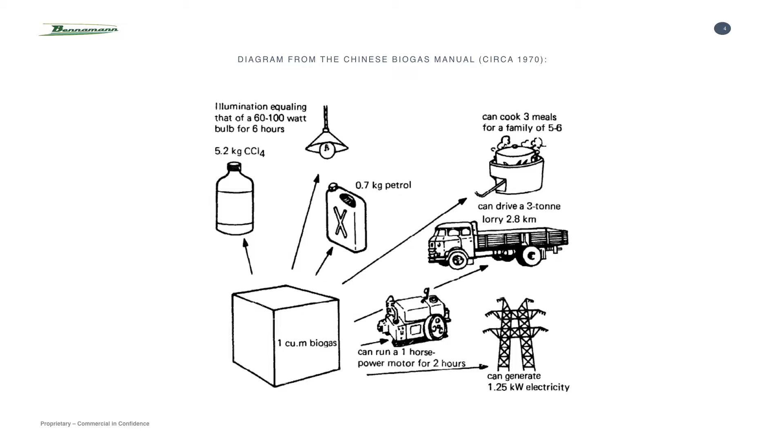But you can take a little graphic like this out of it, and it gives you an idea of what you can do. Some of these numbers are a little bit optimistic, but nevertheless they're not that far out. If you get 1 cubic metre of biogas, it's equivalent to about 0.7 kilograms of petrol—actually more like 0.5. You can run a 1 horsepower motor for 2 hours, drive a 3-ton truck 2.8 kilometres, and get 1.25 kilowatts of electricity. And of course you get the heat as well because it's produced locally.

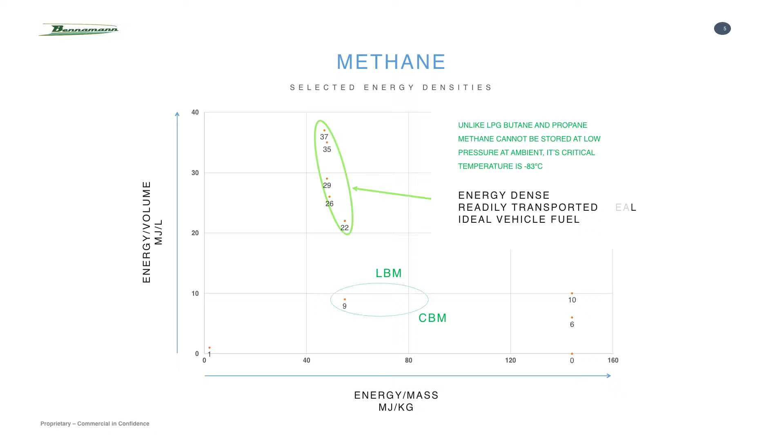And if you want to drive a heavy vehicle, then the only sort of gas that really works in its liquid form is methane. I should say liquid natural gas and methane are not the same thing by any chalk—as you get further and further into the industry, you find that out.

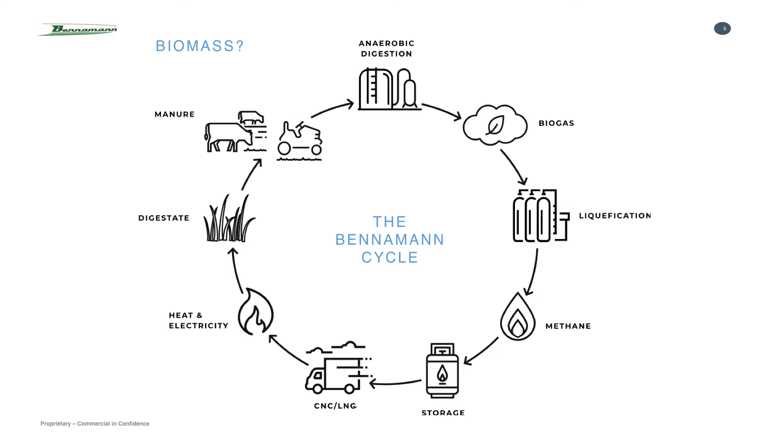So we came up with this idea that you take the biomass, whatever form it is, as long as we can digest it anaerobically, and turn that into biogas. If you liquefy it, you've got a fuel with energy density pretty similar to petrol, propane, or butane. You've got your methane, if you can store it, you can transport it and use it to create CNG and LNG. You can either power vehicles or use it as a direct replacement for heat and electricity. The first engines were gas engines, back in the late 19th century.

What's left after you've done all of that from the digester is a very rich digestate, which you put back on the land, containing all the nutrients that plant took up during its lifetime. Provided you put the same digestate back on the same land - and I must stress that if you start putting digestate from other land, you're putting nutrients in the wrong place - provided you close the cycle, you have a cycle which is completely sustainable and zero carbon.

So it seems like the perfect solution when you start going through this. There's a lot of caveats, and people who've worked in anaerobic digestion on the large scale will know there's lots of challenges in meeting that. But it seems like biomass to methane is the perfect solution.

It has a zero carbon footprint, effectively - I'll come back to that in a second. It's a better fuel for combustion in engines than diesel or petrol. A pure methane engine has the highest octane number you can have, so you can run at very high compression ratios to get very high efficiencies. The only thing that should come out the tailpipe is CO2 and water, so it completes the cycle.

Because of its energy density, it's really the only viable fuel that can replace diesel, for the reasons Penny just said. As a liquid, it's very transportable - you can move it and use it where it wasn't necessarily generated. And as a fertilizer, it adds back to the economy. By putting the digestate back, you're putting a lot of carbon back into the soil, a huge amount, because the parts you can't digest are mostly carbon in the form of lignin.

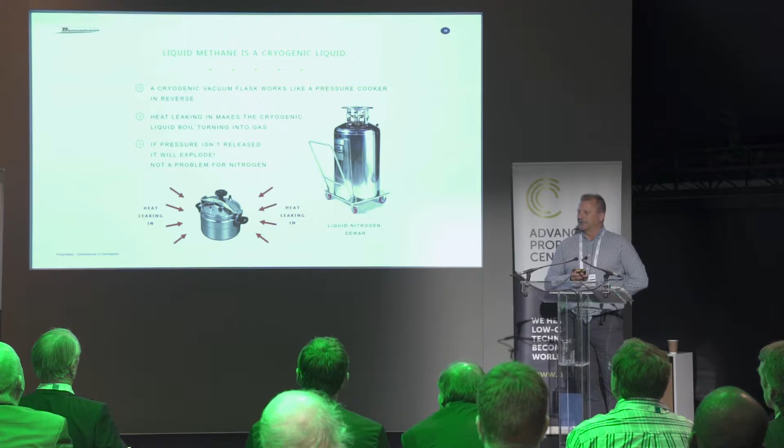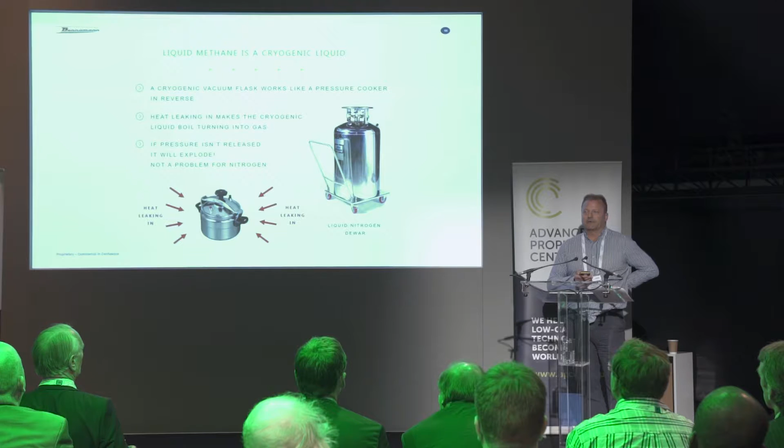Everyone knows a pressure cooker - you put a flame under it, heat it, get it boiling, and eventually release the pressure with a valve, getting a higher temperature in your water, which cooks faster. Well, that's the same for cryogenics, except the heat going in is just from the surroundings, so you want to stop that. Otherwise, eventually, if the pressure isn't released, it will explode. And that's not 'it might explode' - it will explode.

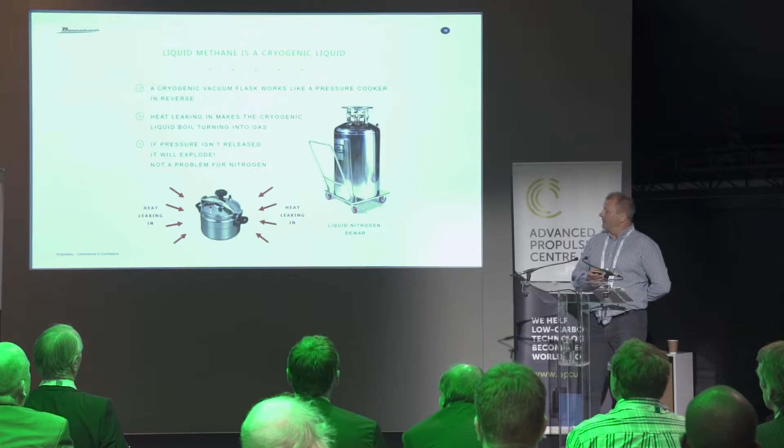Of course, it's not a problem for nitrogen. All of the standard cryogenic technology is based around early technologies coming out of the Second World War, which used cryogens a lot - they were used in the space program, and they didn't really care about emissions in those days. A lot of that technology comes from just storing nitrogen, which you can release very easily because it's part of the atmosphere. Liquid oxygen you can release because it's part of the atmosphere, as is argon.

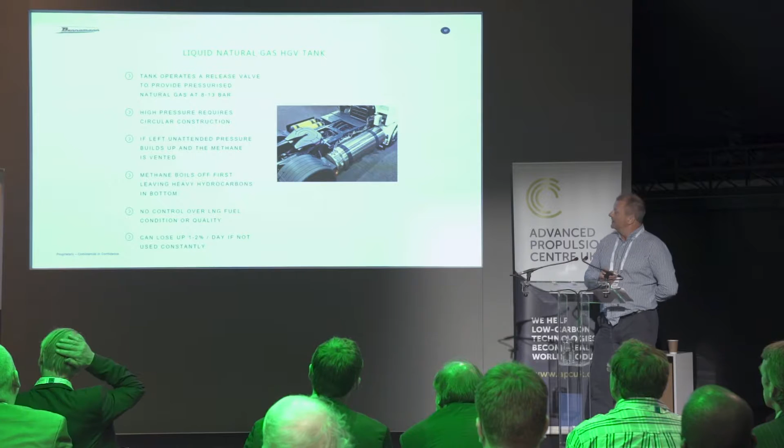But methane explodes. This is exactly how the technology on a liquid natural gas truck works. It operates at a pressure of around about 8 to 13 bar, and that high pressure requires a circular construction on the tank.

That limits the amount of volume, and in turn the energy, that you can store within a given length. So the challenge is always to get as much energy onto the vehicle as possible.

But if you leave that truck unattended for around 5 days, eventually that methane will be vented. Now, they get around that in the industry because those trucks are losing money if they're standing still. So whilst you're drawing the gas off, that pressure never gets to a point where it vents, so you can manage it. But if a truck breaks down, it is a problem. You've got to think about where that gas goes.

You've got no control over the LNG fuel qualities - liquid natural gas. Natural gas is made of a variety of gases. It could be CO2, butane, ethane, propane, xylene, a few other nasty little things in there as well.

But if you don't do anything with it, you lose 1 to 2% a day if it's unattended. That doesn't sound a lot, but methane is 25 to 35 times worse than carbon dioxide as a global warming gas. Now that depends on where you read, the literature you use. It's quite a difficult thing to calculate.

So if you leave it unattended, 1% loss on a 200 kilo tank equates to 2 kilos of lost methane. Multiply that by 35, that's 70 kilos of CO2 equivalent for standing still.

So how do you manage the emissions? Venting is not an option because of that big number at the top there, 25 to 35. And also methane slip through the tailpipe - not all engines burn all the fuel, some of that ends up out the tailpipe. So if you've got 1% methane slip, similar problems, you have to multiply all those numbers.

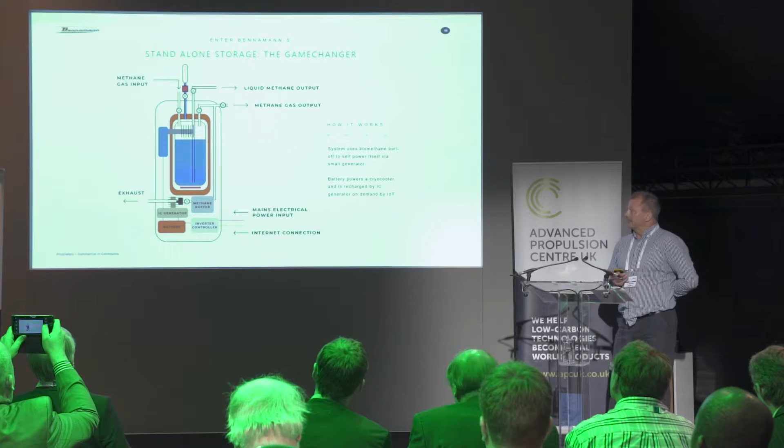If you take a standard liquid nitrogen tank, fill it full of liquid methane, eventually that gas will vent. But instead of venting to atmosphere an inert gas, it's an active gas - it's got all the energy contained within it. And methane actually contains 6 times the amount of energy it's needed to liquefy itself. If I was to compare that with hydrogen, it would need 3.5 times the amount of energy it contains. So it's 1/6 versus 3.5.

And that's because hydrogen is a liquid at 20 degrees Kelvin. Methane's a liquid at 112. So how does it work?

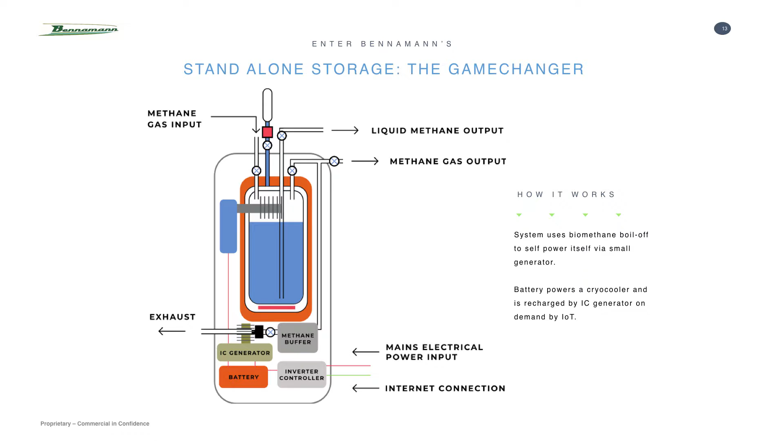We take the gas that would otherwise be vented, we run it through an engine, a fuel cell, generate some power, use that power to charge a battery, and when the tank is about to vent, we switch on a cryocooler inside the tank, we bring the temperature down, recondense the gas, and that venting stops.

Now, with a combination of some really novel cryogenic design taken from the space industry, where they're always trying to keep as much gas in the tank, we can increase the hold time by about a factor of 10. I won't go into the patent, but you can see it's real - this is going through in Europe as well at the same time. So basically, we use that gas that would be vented to extend the hold time of the tank.

So now we have a fuel that is non-venting. It's a liquid fuel that has similar energy to diesel. There's no need to connect this to the grid, we don't need any power, so it's standalone. And if we use the Internet of Things, we can control it - we can switch it on and off and monitor it. It means it can be unattended.

And we can use those free biogas feedstocks wherever they are, be it food or plant material, to create that energy anywhere in the world. We don't need a grid network, we don't need a gas mains. This is completely a game changer.

The interesting thing is that fuel as a liquid is worth around about 4 to 6 times more than the electricity it could produce if you were without subsidy. So you've now got something which is commercially viable. You can transport it to wherever you need to use it from the place where it's being created. But also, because you can store it, you sell it when you get the best price, so that price is now driven by the open market.